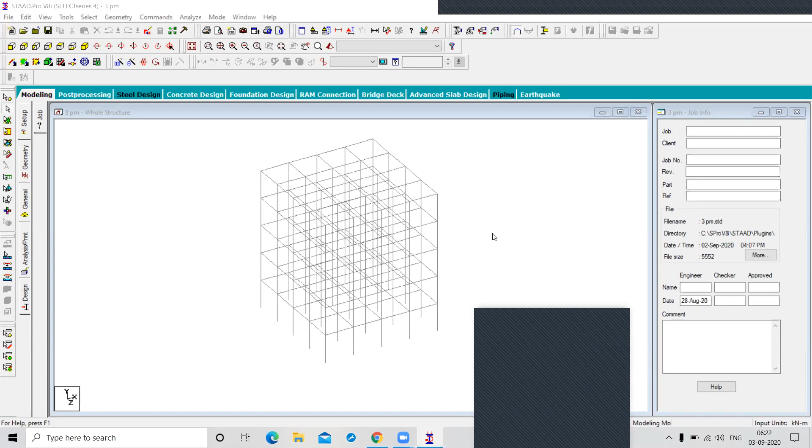Okay, yes. Now I'm going to explain how to apply the loads. Go to the general, click on general tab. Right. Okay, first we... this is the second, I opened the wrong figure.

This is your figure, right. Okay, for applying for the load, we go to the general.

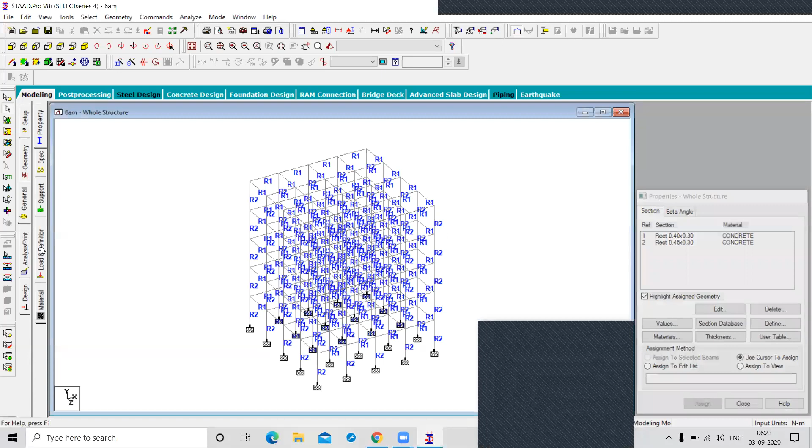In the general, we applied the property in support yesterday, right? But today we are discussing about the load and definition. Click on load and definition here. And you have another option to go to the command and go to the loading. And this is your primary loads, right? So this window opens while clicking on the primary load.

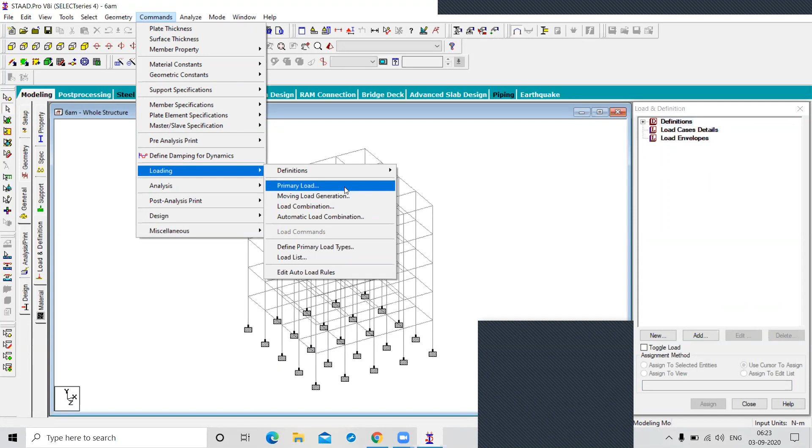Here we have first the definition tab, second is load case detail. In the definition, we have to define the loads which change according to the location or environment.

Which type of loads change with the location or environment? Live load, sir? No dear, live load doesn't change with the location. Your wind load? Yeah, wind. Then temperature, yes, your wind load, and your seismic load also. Seismic load, yes. And snow load, yes.

So in the definition, you have to define the wind load, snow load, seismic load. So this is your definition for the loads which will change according to location and your requirement.

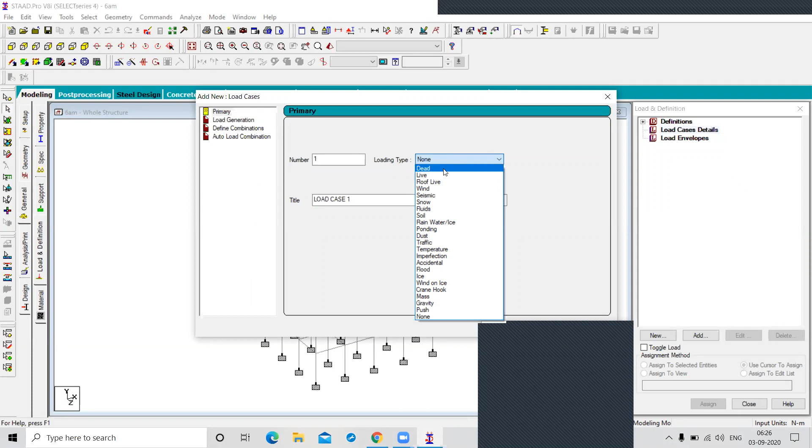Go to add button. Here we have some load categories or load cases. So now I am taking the dead load. This is your dead load, right? Named as dead load.

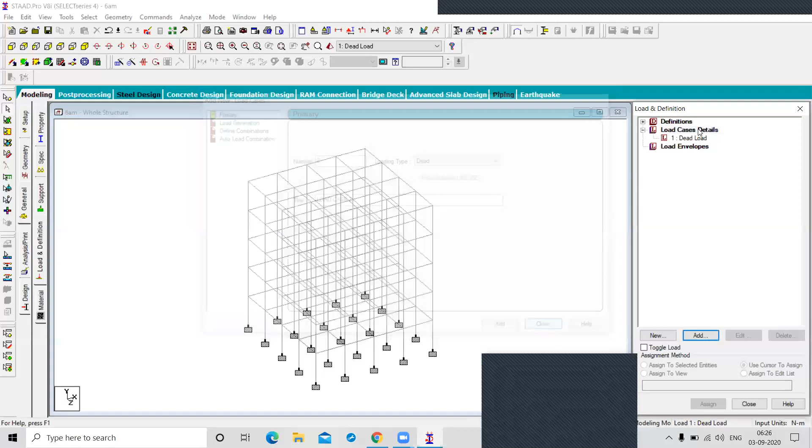Okay, and click on add, and click on close. So this is your dead load folder. What is this? Dead load folder means case. In the dead load, you have to apply your loads.

Got it? Yes sir. So select your dead load and go to the add button. In the load case, you have to click on the load case and go to add. Now again select your dead load and click on add.

Now we have self-weight, nodal load, member load, uniform, uniform force, concentrated force, linear varying force, trapezoidal force, right? All types of the member loads.

First we are going to talk about self-weight. So we all know self-weight is the weight of your members, right? So in which direction is this load applied?

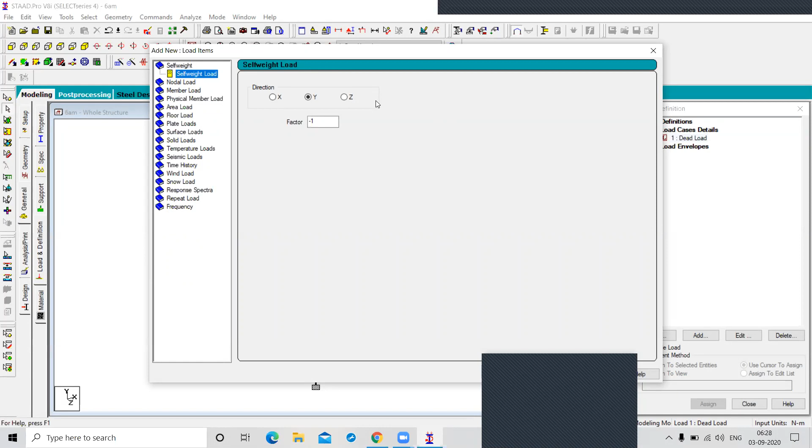In which direction, X, Y, or Z? Explain. Our drawing is in XZ plane. Very good, because we are considering that my load is applying top to down, in vertical direction. And that's why we choose Y axis.

And below this, a factor is there. What is this? Safety factor. And what does the negative sign denote here? Downward direction, yes very good. Vibhuti, why do we assign the negative? Due to downward direction, which is gravity. Yes, very good answer. Because we are considering that the load is applied in the downward direction.

Okay, so after that you have to click on the add button. So see, my self weight is added in the dead load category. This is the first load in your dead load, right?

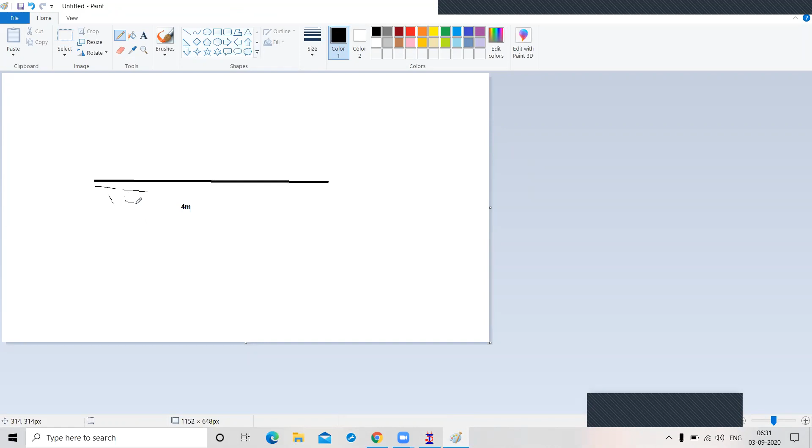Okay, what is the D1 distance? Given distance, or 1 meter, 2 meter. See, consider this is your member, and the length is 4 meter. Now I am going to apply the UDL from some distance, starting at 1.5 meters.

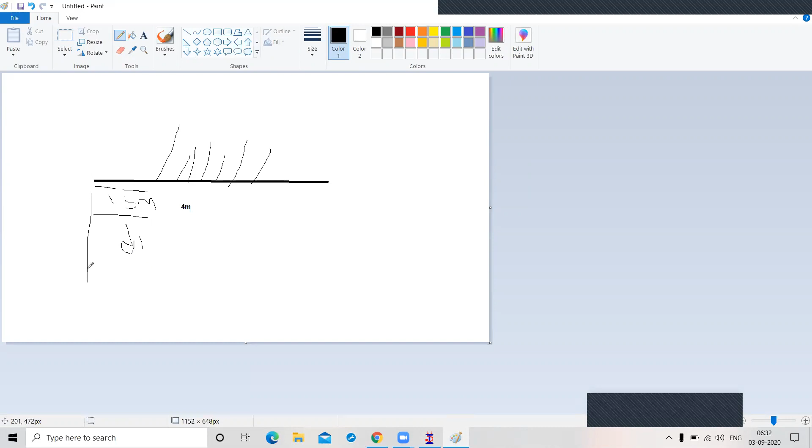So this is your D1 distance. Here your load is applied. From how much we left from the starting, that distance - so this is your D1. What is D2? From the starting to the end here, this distance is your D2.

Yes or no? So D1 is 1.5 meter here, right? And this is your D2, 4.5 meter. So what is the length of your load? The total distance is 4 meter. Oh sorry, this is your 3.5, sorry.

What is the length of your load? 4 meters is the length of your beam, of your member.

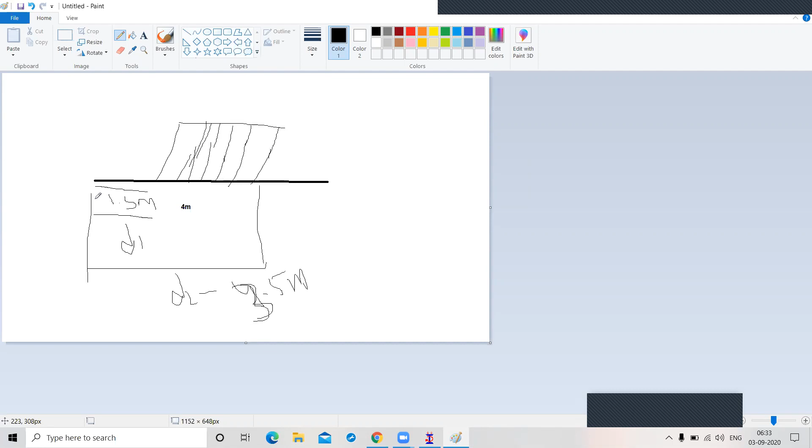I'm talking about this distance from the starting load to the end load. This one, 2 meters, 2 meters. Yes, but you specify this load from the starting. That's why it comes to 3.5. And the remaining distance was 0.5.

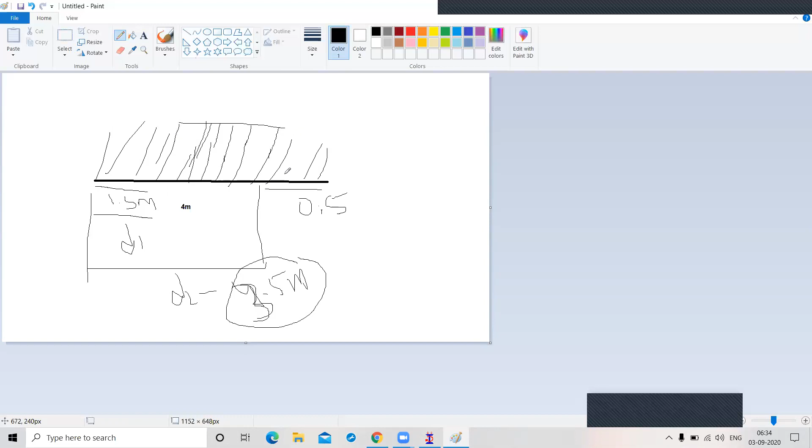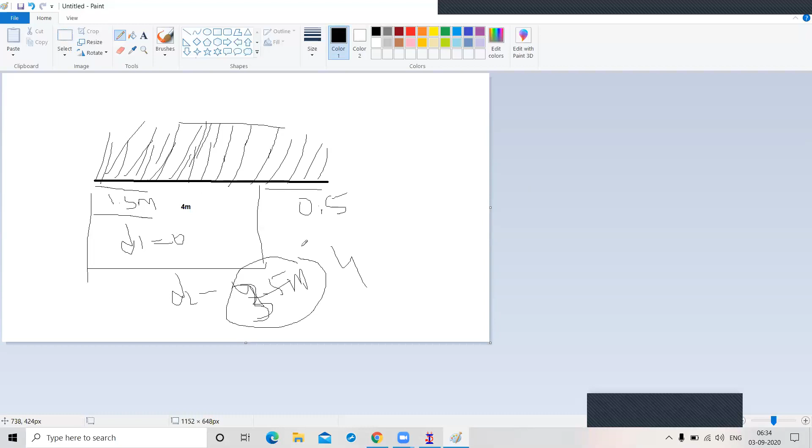If I applied the load from the starting to the end, so D1 is 0. Yes or no? D1 is equal to 0 and D2 is equal to 4. Yes, sir. Repeat: if you applied a load from starting to end, what is the distance of D1? 0. And D2? 4 meters. So what about D3? We're talking about D1, D2, and what is D3?

What is the width of your member? 300 mm, 0.3 meter, right? Yes, 300 mm.

So you have to apply the load in the middle of your member. See, D3 is specified in this figure. This is considering the width of your member, right? Yes. So you know about D1, D2, and D3?

Alright, now I am talking about W1. What is the value of W1 for the wall?

By the whole beam, then density of brick, density, into height of the wall, into length of your wall, into width of your wall, right? Length into width into height is the volume. So can we multiply with the density?

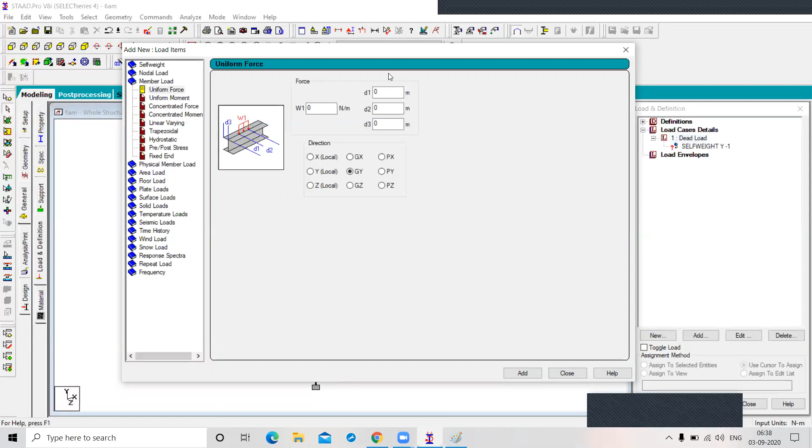If you have the weight of your brick, if multiply by your density, what is that? What is the unit of density? Kilogram per meter cube. Kilogram per meter cube.

Just see here, density, this is your Newton per meter cube. It means, volume multiply by your density, right? Yes, so density is 23.56, 23,561.6. It means in Newton, right? Okay, now the value comes in Newton after multiplying this.

Okay, good, very good, right. So the Newton weight comes out by multiplying the volume of wall. Yes or no?

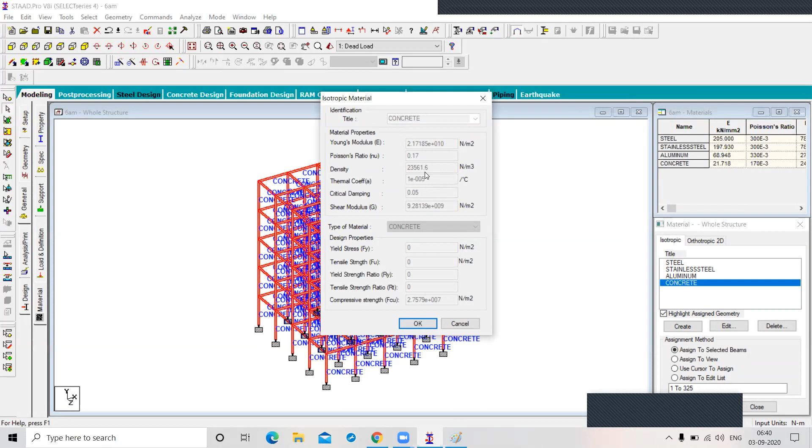Yes, sir. Okay, so what is the value of G? 9.81, and your unit? It will be gravity, the value for G, gravitational force. That value is 9.81 meter per second square. This is the acceleration due to gravity, right?

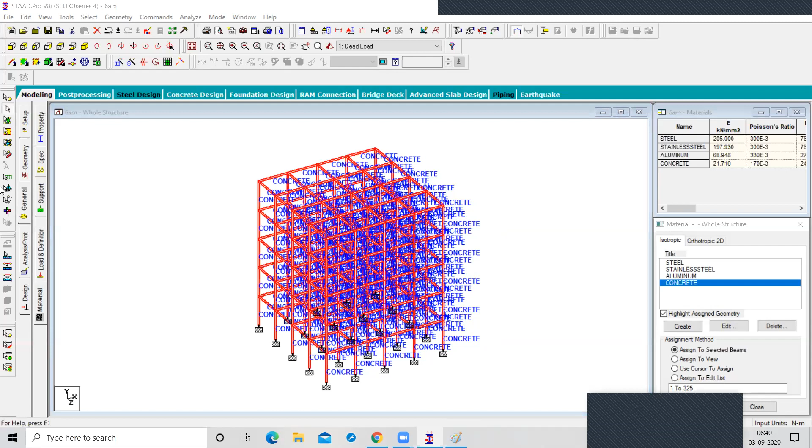Yes, okay. So the second method is you find the number of bricks in your wall. Yes or no? Can you find the number of bricks in your wall? Yes, sir, can you able to find the number of bricks in your wall?

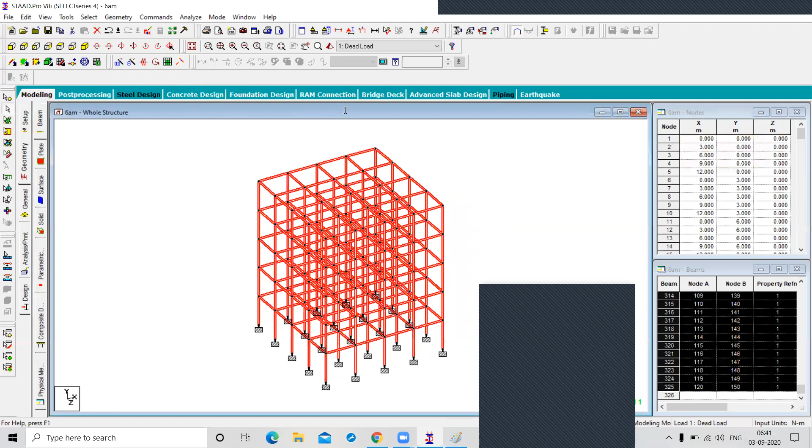Number of bricks in wall. Dinesh, you are able to find the number of bricks? No. Explain again, sir, the question: can you find the number of bricks in your wall?

Volume of your wall is divided by the volume of one brick size, total size of one brick. Volume of one brick, right? All agree? Yes, sir.

The number of bricks comes out. Can you multiply by the weight of one brick in kg? Your screen is slow, sir, now. Now I'm doing nothing with the screen, dear. Okay. Just you find the number of bricks. Agreed? Yes, sir. Then you have a weight of your one brick.

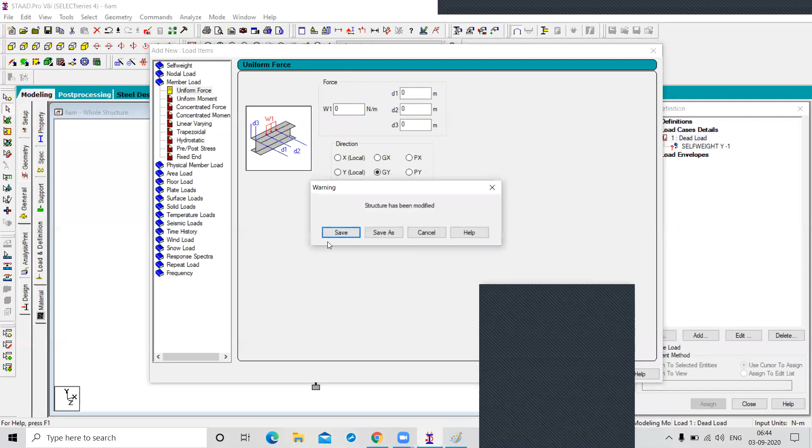Yes, sir. Okay. So what was the volume of my wall? The length is 3 meter, remember? Yes. And the height is also 3 meter. Sorry. And width is 0.115 meter. Yes. So you can easily find the volume of the wall, right? And you know the dimension of your one brick: length, width, and height.

190 into 90 into 90. 90 into 90, this is your cube. No, dear. It is a cuboid. Okay. It may be 230 if you consider a brick as 9 inch, right? 230 and 115 into 115. Height and width consider as 4.5 inch. Yes.

Okay. So let's find what is the value of W1. Tell me. You have two processes. You find the weight as volume of wall multiplied by the density. This is one method. And the second one is the number of bricks into the weight of one brick, multiplied by g. Yes. So find the value and tell me.

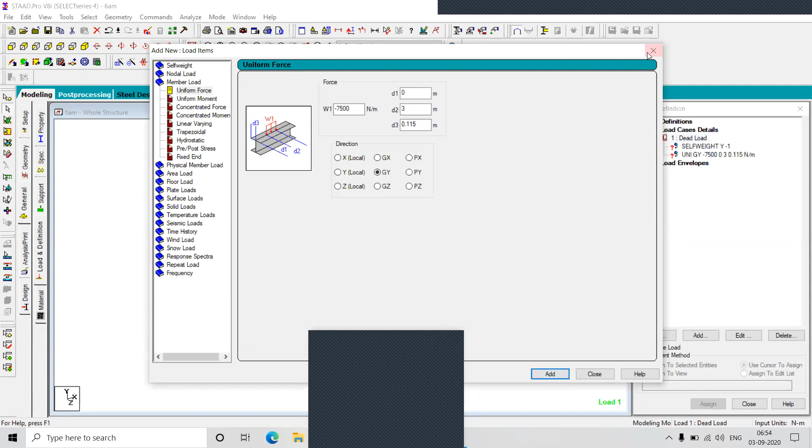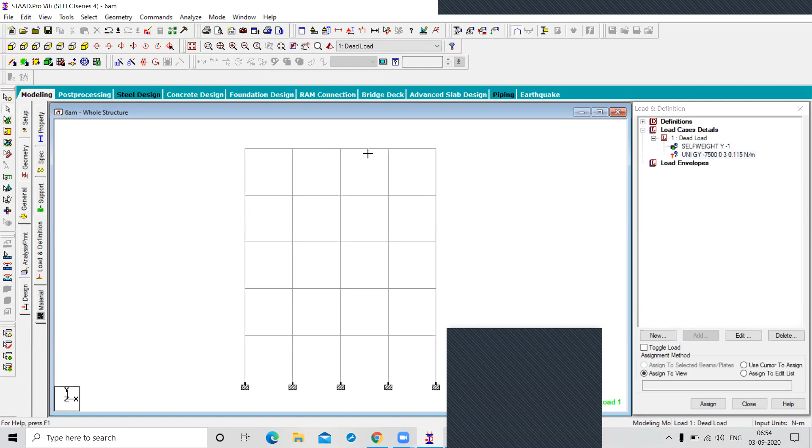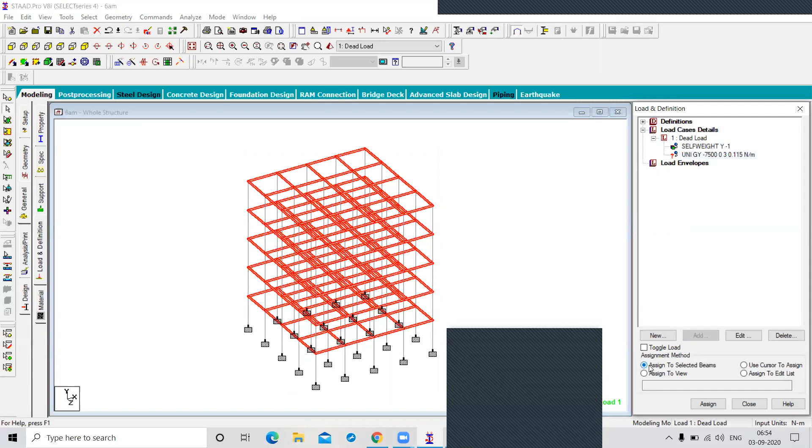Click on add button. Close. Now we have to assign this. Not assign to view, because self weight is applied on all parts of the body, like this. And this is applied only on the members. So you have to change your view. Click on the control button and select like this. So these are your members. So see, all the members are selected; go to assign to selected beam, click on assign and yes. So see, the blue color is applied on each and every member, uniformly distributed.

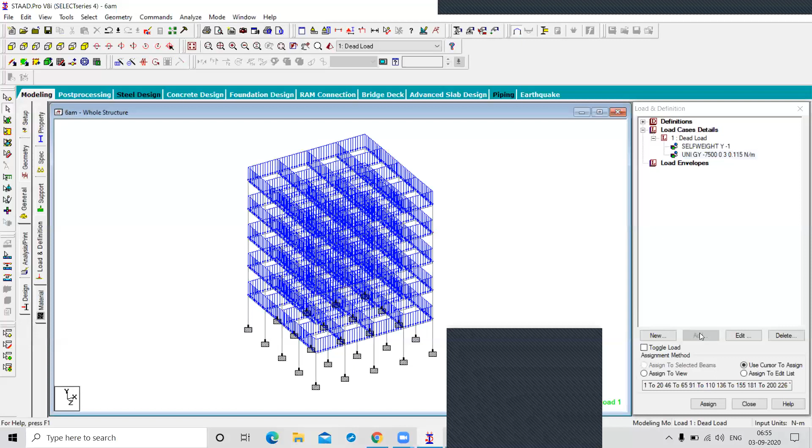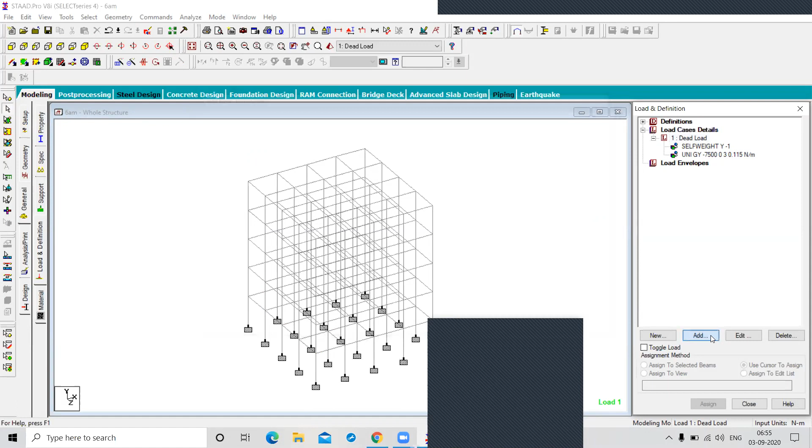Okay. The last load remaining in the dead load is the floor load, or your slab load, right? Go to select dead load. Yes, Dinesh. Sir, each and every floor can have different types and different loading sometimes. Yeah. You can choose different types of load. First you consider this load. Okay, no problem. Go to the dead load, select add, and go to the floor load.

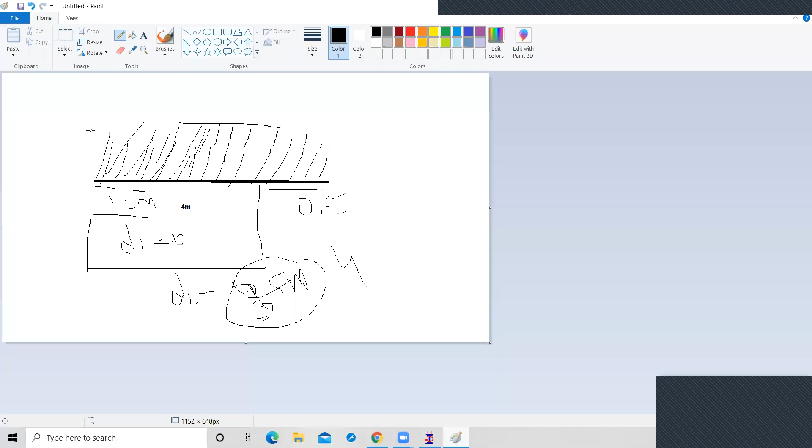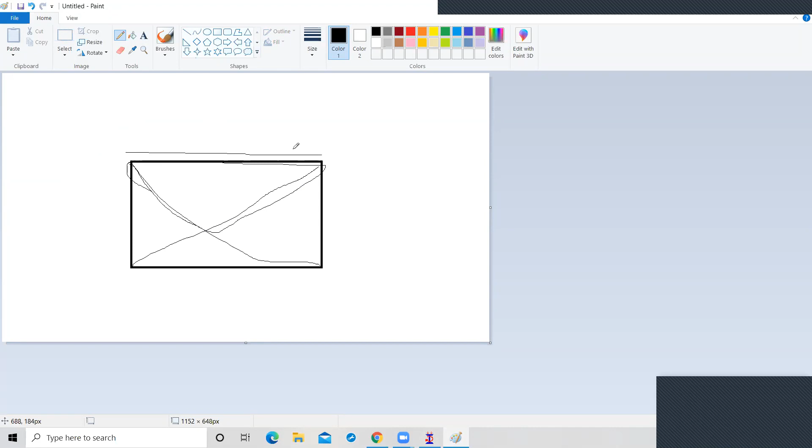Listen here. See, your load is on a rectangular slab. You know what is one way or two way? Yes, sir. So if you join your corners like this, the weight of this triangle is distributed on this member, the weight of this triangle on this member, this triangle on this member, and this triangle on this member. Yes or no? Yes, sir. And this comes on your member in a triangular shape.

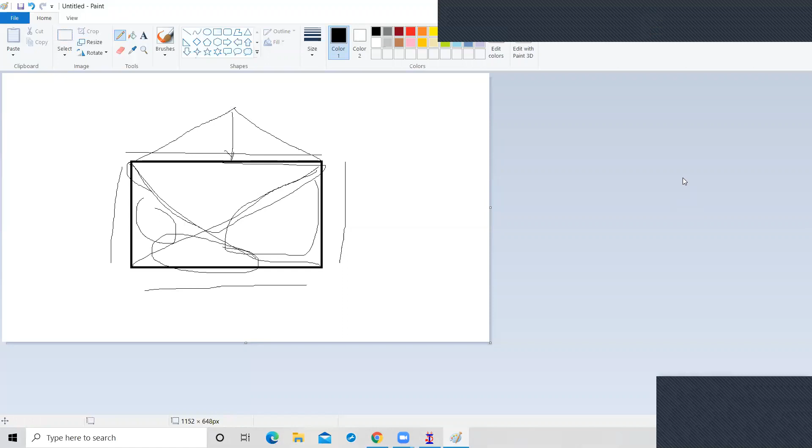So this slab floor load is considered as linearly varying, because it starts from zero, gradually increases up to the maximum point and gradually decreases back to zero, like this. So the area of your floor is 3 into 3, 9 meters square. So what is the value of pressure on your floor? Multiply by the weight density of concrete. Okay.

Oh, in the wall we did a mistake. 23 is the density of concrete. 24, sir. No, 25. We consider 25 as the density of concrete. So if you did your practice, you multiply with the density of brick, not the concrete. Remember that. So here you can find the pressure by the volume of slab multiplied by the unit weight of concrete. Yes or no?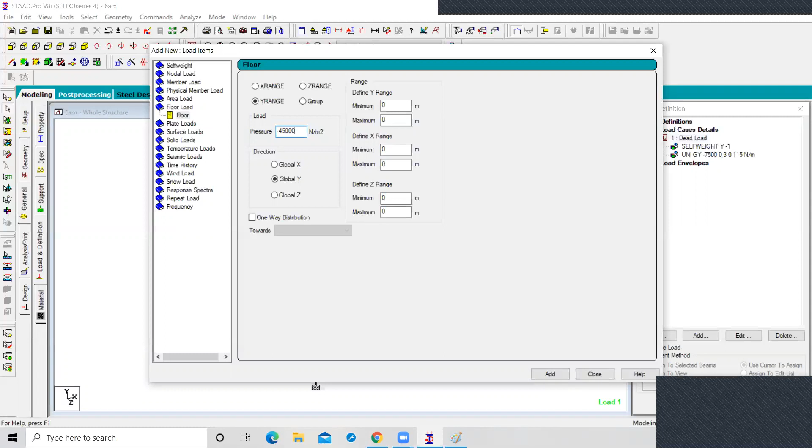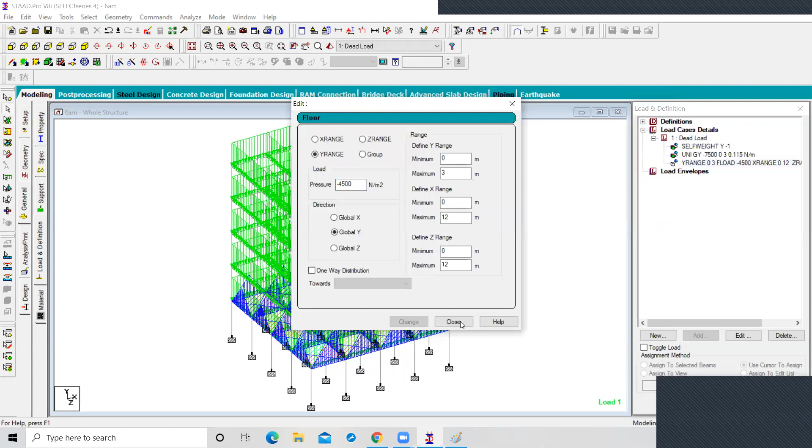Yes, sir. So here I am going to give this. Yes. So this is only for the first floor. So you give the Y range as 0 to 3, X range 0 to 12, and Z range also 0 to 12. Click on add button, and now you see the value is high up to this point. So this is your triangle shape, only considered for the first floor.

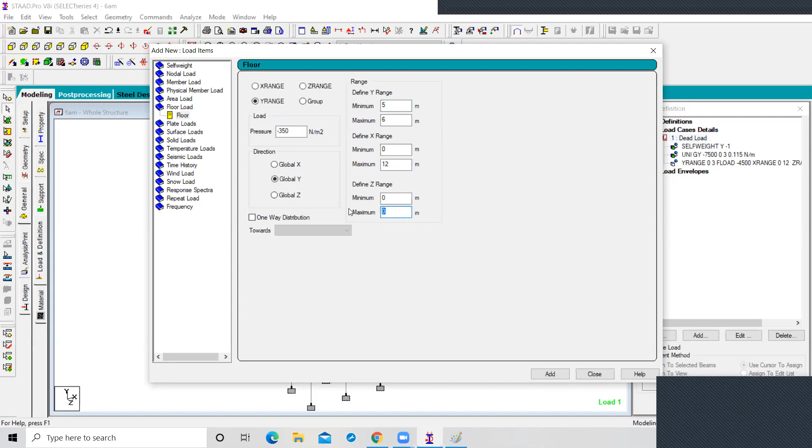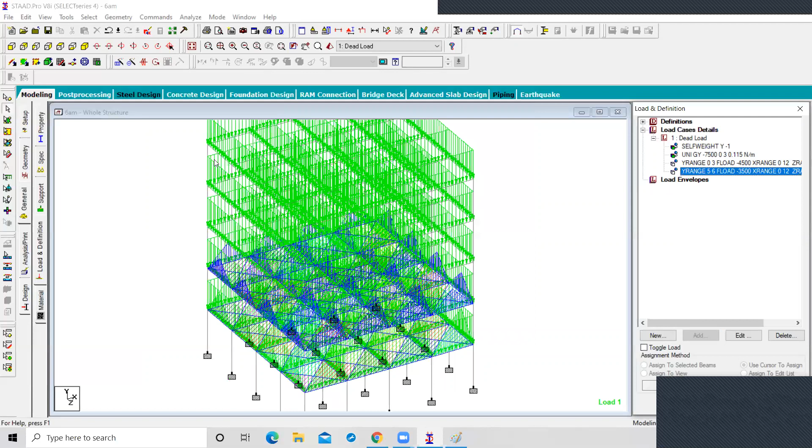Similarly, you can add another floor load for the second floor, and the Y range is 5 to 6, not 2.5. And X range is the same, 12 and 12. Click on add button. So this is only for the second floor. Yes or no? And similarly the third floor, fourth floor, and fifth floor. Okay. So this is your homework to apply.